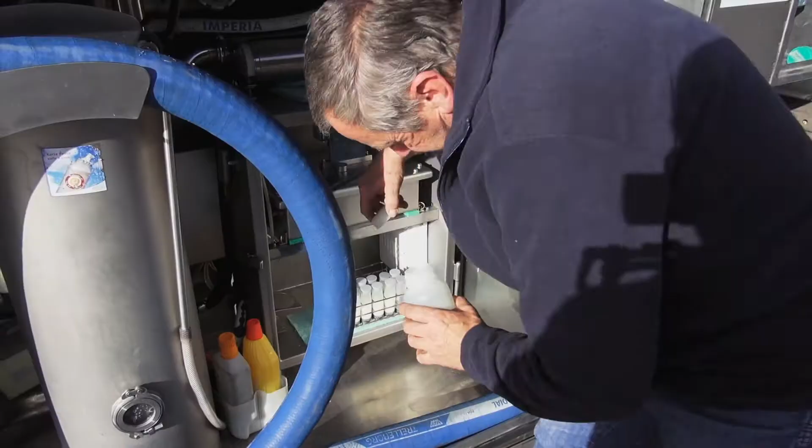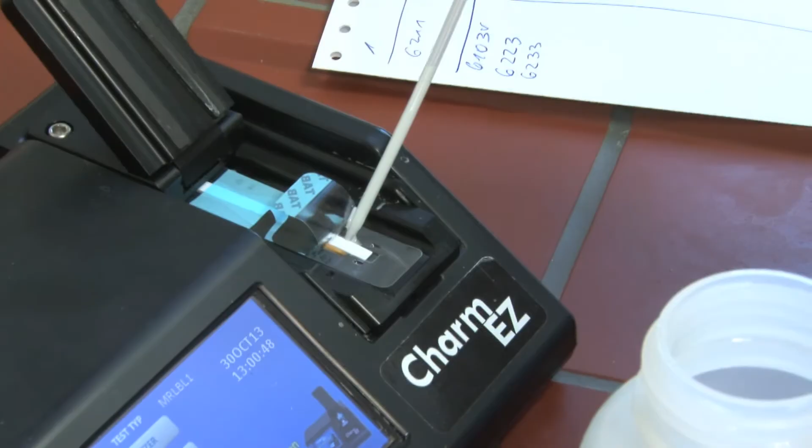Because the tank trucks transport milk from several farmers, each farmer must supply a sample. Every sample is tested in the cheese dairy's laboratory before the milk is discharged. The delivered milk is prepared by pasteurization and then filled into the cheese vats.

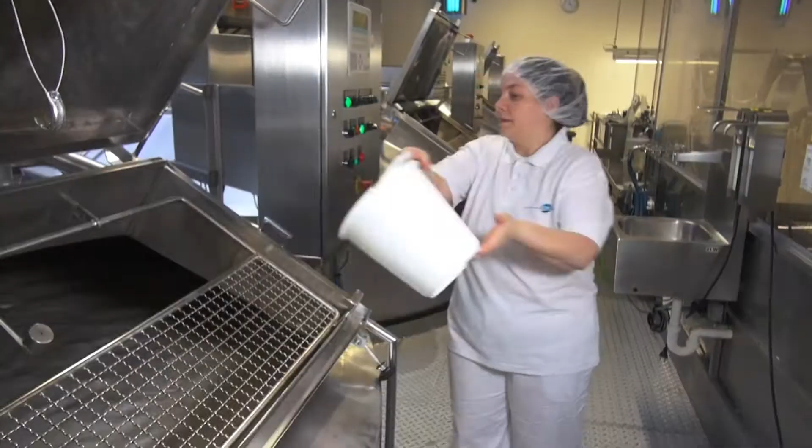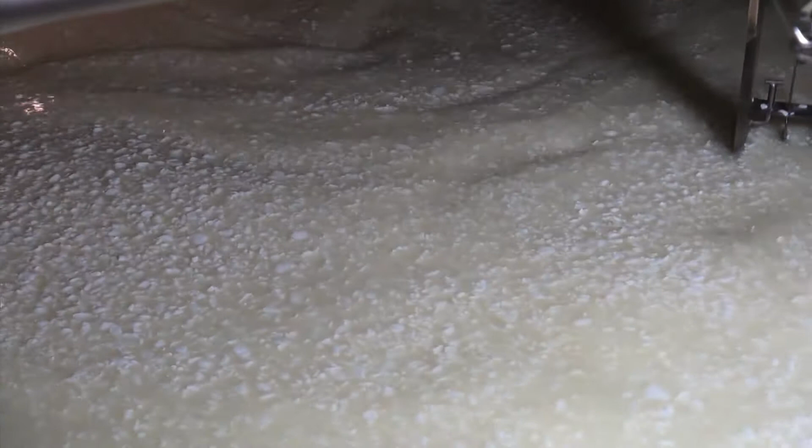By adding an enzyme mixture called rennet, the milk is curdled, as the experts say. The resulting curd is finely sliced with a so-called cheese harp. This separates the white curd, from which the cheese is later made, from the yellowish whey. Once the curd has settled, the sweet whey is pumped out.

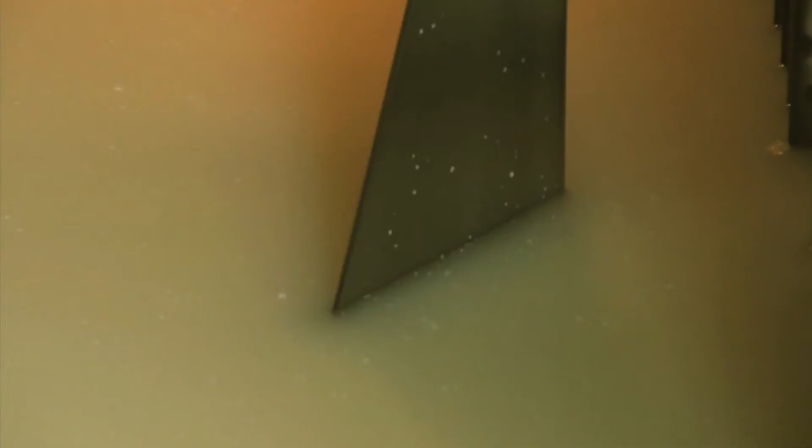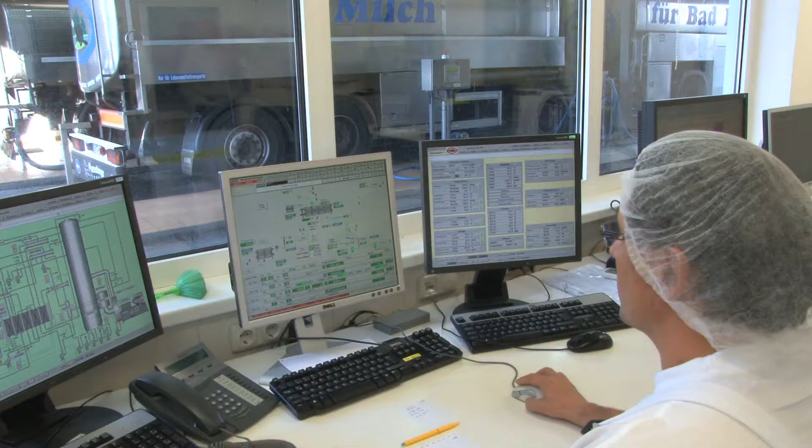As a byproduct of the cheese production, the sweet whey has a dry matter content of about 6%. On site in the dairy, the whey is gently concentrated to about 30% dry matter and stored. It is then loaded into tanker trucks for transport to Biolac. Whey is a valuable resource that contains nutritionally high-quality proteins, lactose and salts.

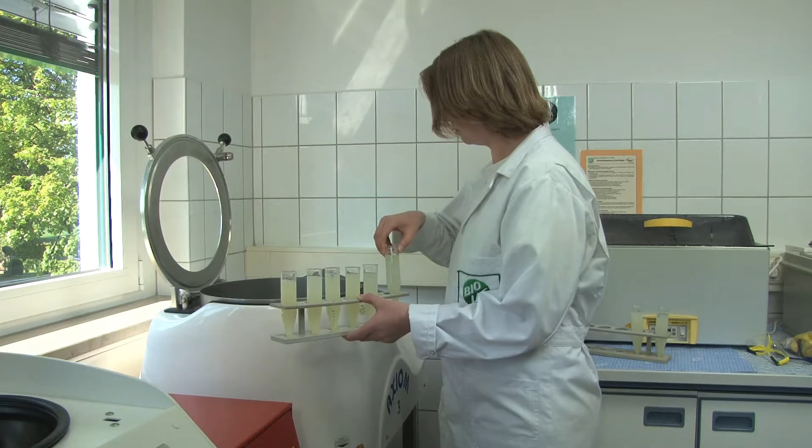Back to Biolac in Harbarnsen, Lower Saxony, near Hildesheim. This specialty company focuses on the processing and refinement of whey concentrate. The central location opens up the whole of northern Germany. The catchment area for the resource stretches from the island of Rügen over Schleswig-Holstein and Lower Saxony to Hessen and Saxony.

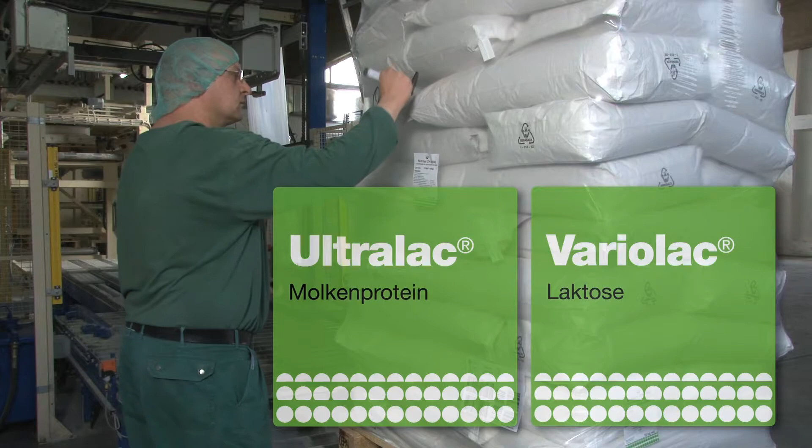The products, whey products under the Ultralac brand and lactose under the Variolac brand, are sold worldwide and used in many end products. In pastry products of all kinds, in confectionery and snacks, in yogurts, dressings, dips and other dairy products, in ice cream, in baby foods, dietary foods and energy products.

Lactose is used primarily as a flavoring material, as raw material in the pharmaceutical industry and as a filler or carrier. The whey protein combines high nutritional value with important functional properties, such as water binding, gelling ability and stabilizing.

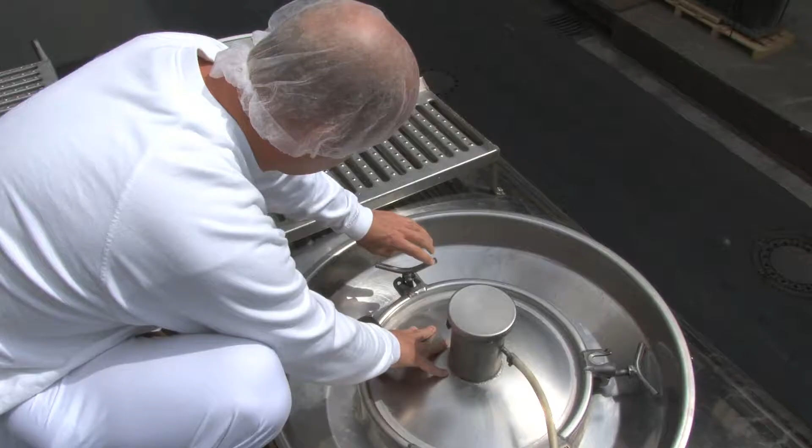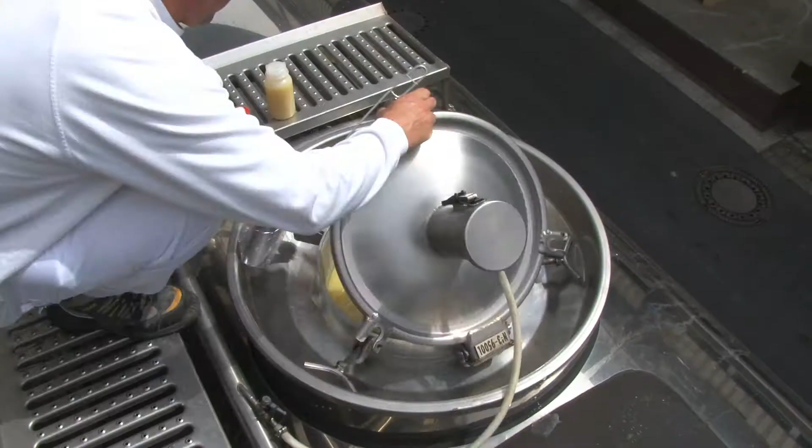The production at Biolac begins with the delivery of the raw material. The sweet whey concentrate is freshly delivered in tanker trucks around the clock, 7 days a week. Each delivery is inspected and sampled for pH value and temperature. Based on the sample results, the operator in charge of the raw material reception determines whether the shipment meets the high-quality requirements. Only then is the tanker truck unloaded.

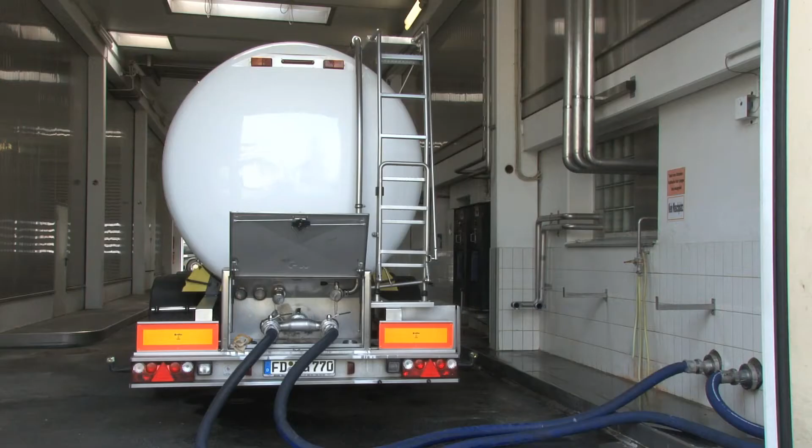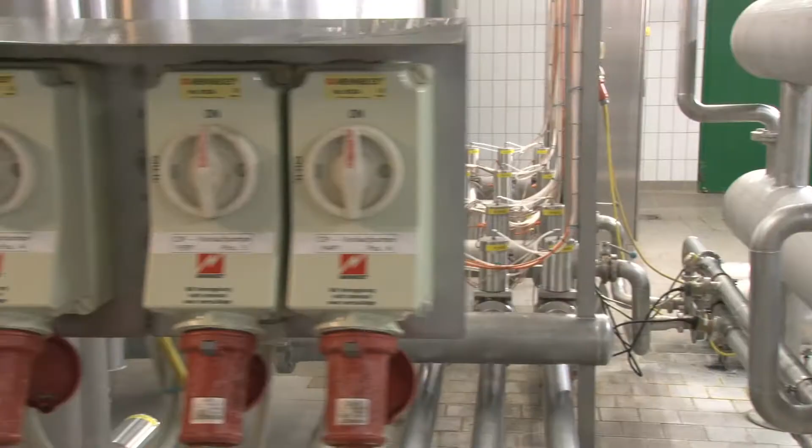The raw material is intermediately stored in special raw material tanks that can each hold 200,000 gallons. Subsequently, the actual processing starts. The raw material tanks, as are all tanks and equipment at Biolac, are completely cleaned after each discharge by CIP, which stands for cleaning in place, before being refilled again.

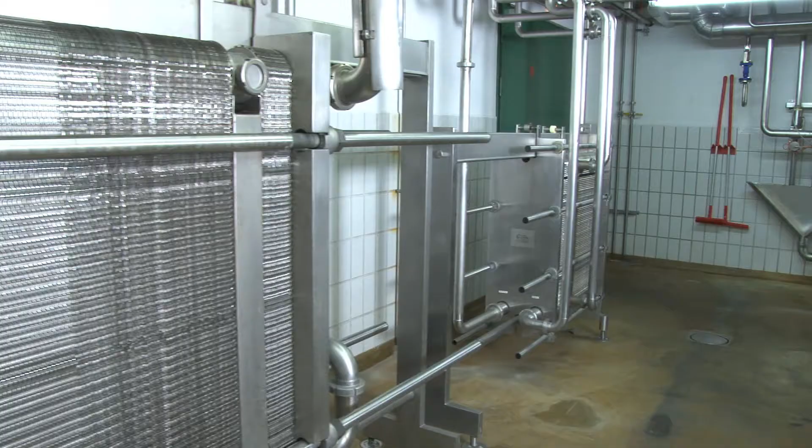During the thermal treatment of sweet whey, classic parameters of the dairy industry, such as pasteurization, are used, heating to 74 degrees Celsius for 15 seconds. The next stage is the ultrafiltration, also known as UF, the so-called heart of Biolac.

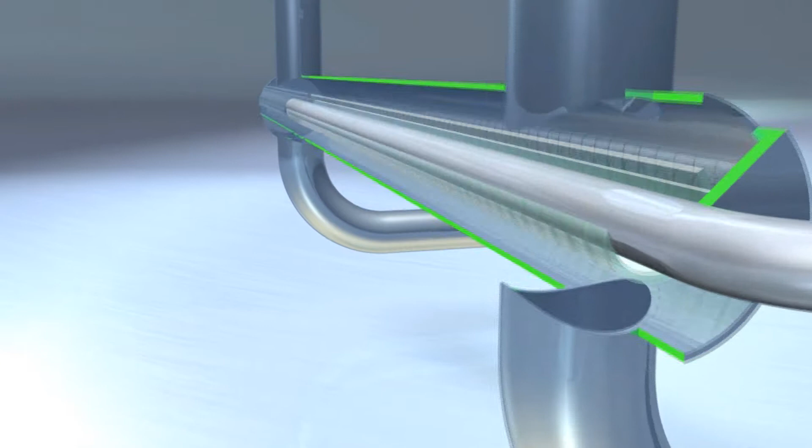In this highly modern ultrafiltration equipment, whey proteins and lactose are separated. This is possible because protein molecules are considerably larger than sugar molecules. The lactose penetrates as permeate through the filtration module, while the whey proteins are retained as retentate.

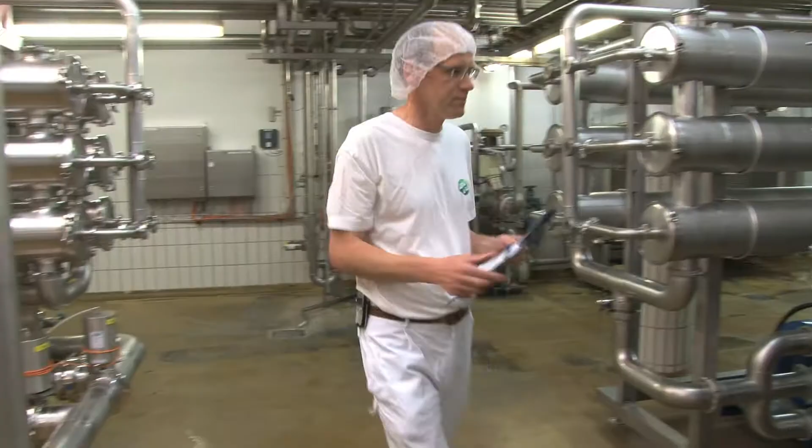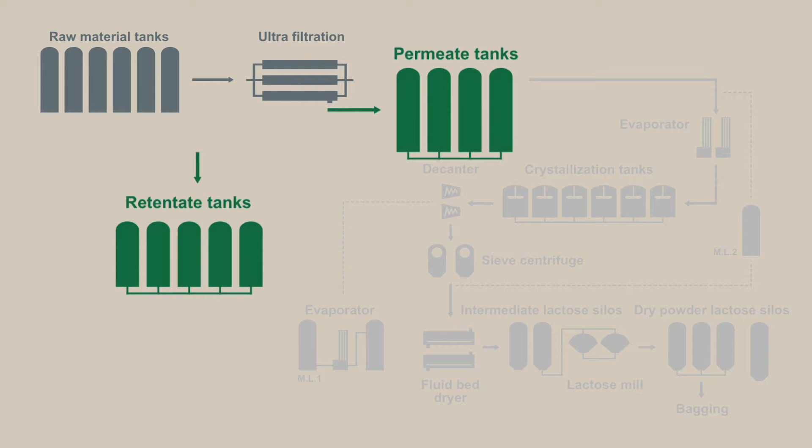The multi-stage UF system can be so accurately controlled that each customer receives exactly their requested whey protein concentration. After ultrafiltration, the whey protein and lactose constituents are individually further processed on separate production lines.

The permeate, the liquid lactose, is pale yellow in color. This color is caused by riboflavin, a vitamin that is naturally present in milk. On request, the permeate may be decolored, whereby the finished lactose is pure white. The permeate is initially concentrated in 2 steps.

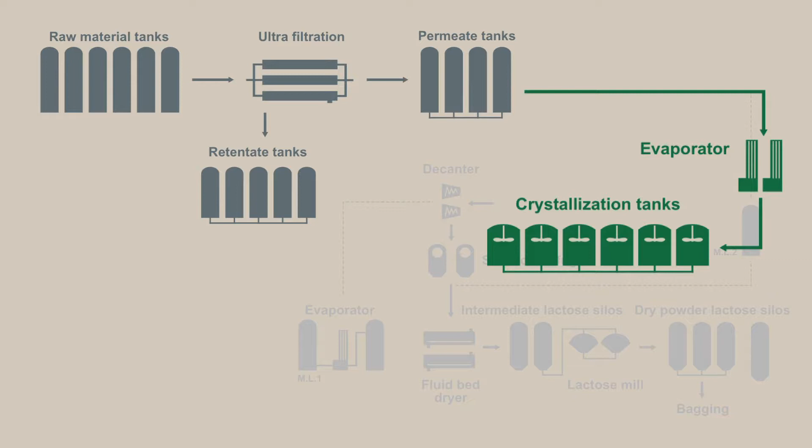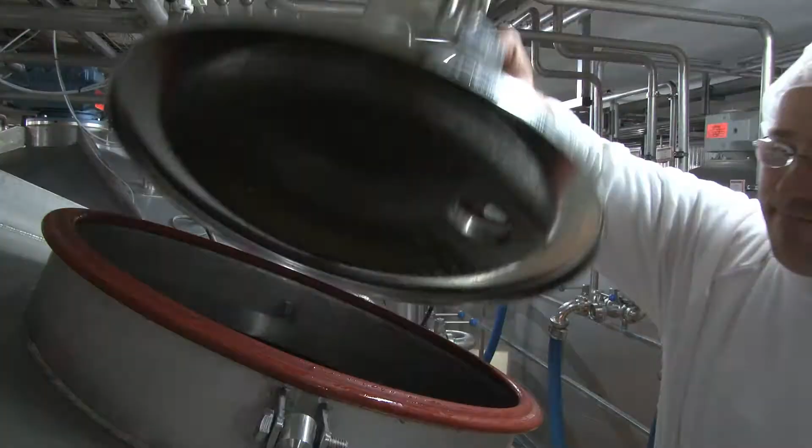Subsequently, it is charged into a crystallization tank. Here, the concentration of the lactose is already so high that crystallization begins spontaneously. Seed crystals or other crystallization aids are not necessary. At the end of the crystallization, the lactose crystals float in the remaining solution, the so-called mother liquor.

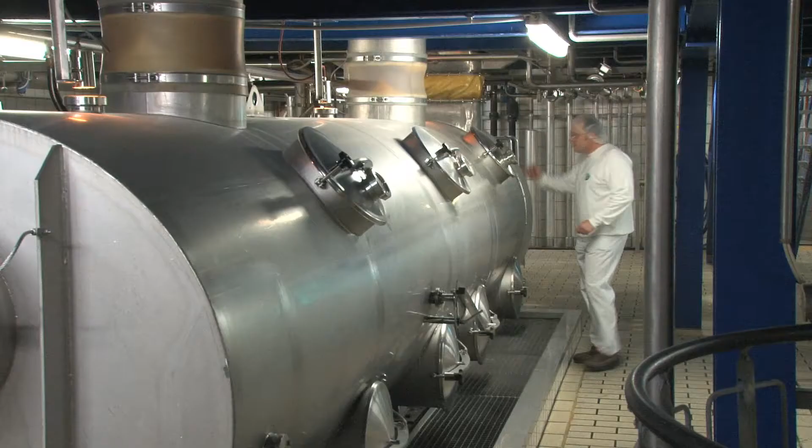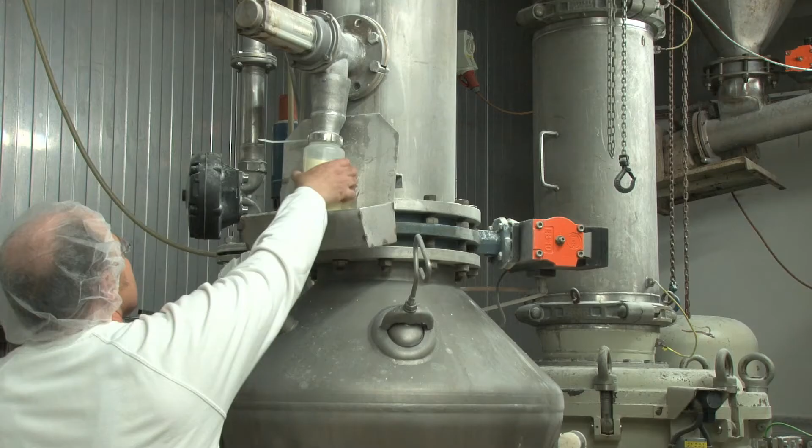The mother liquor is separated in 2 steps from the crystal pulp. The crystal pulp is then dried to a powder in a fluid bed dryer. Depending on customer requirements, the finished lactose can be ground in special mills. The spectrum ranges from fine table sugar to icing sugar.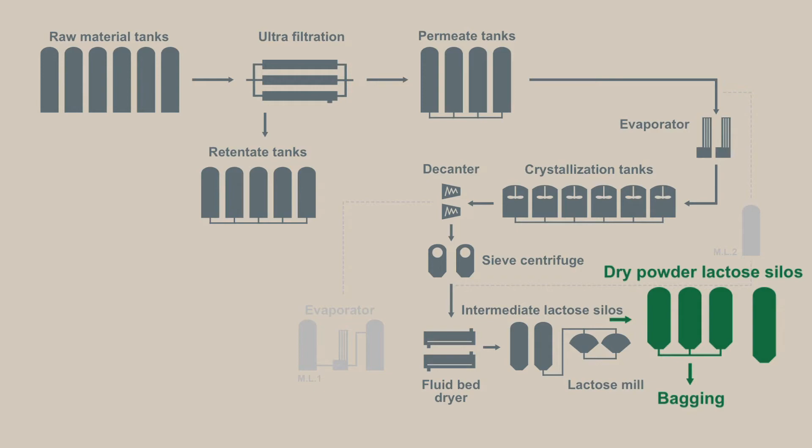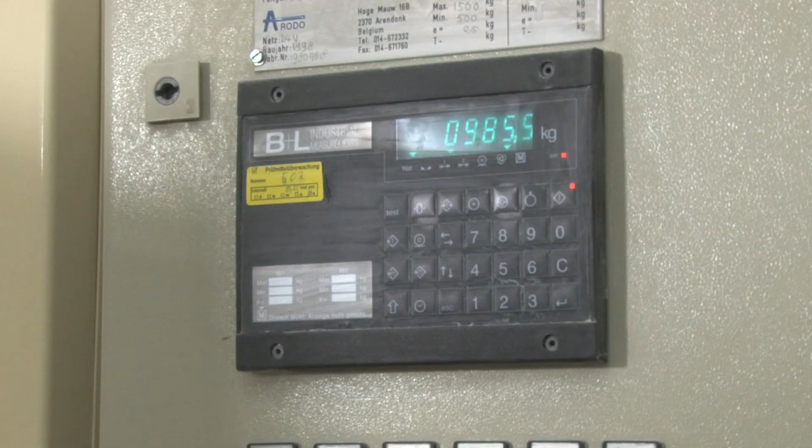The final powder product is intermediately stored in special silos. Based on the customer's wishes, the lactose can be filled into sacks of 25 kilograms. For large quantities, big bags between 500 and 1,000 kilograms are suitable, or loose filling directly into silo trucks.

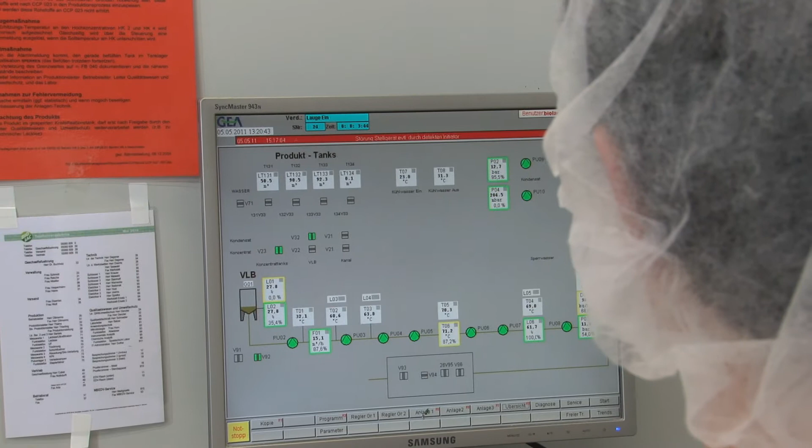The liquid retentate, the whey protein, is first heated. Thereby, important functional properties of the protein, such as the water binding powers, are set. A portion of the whey protein is supplied in liquid form by tanker trucks directly to customers in specific industries.

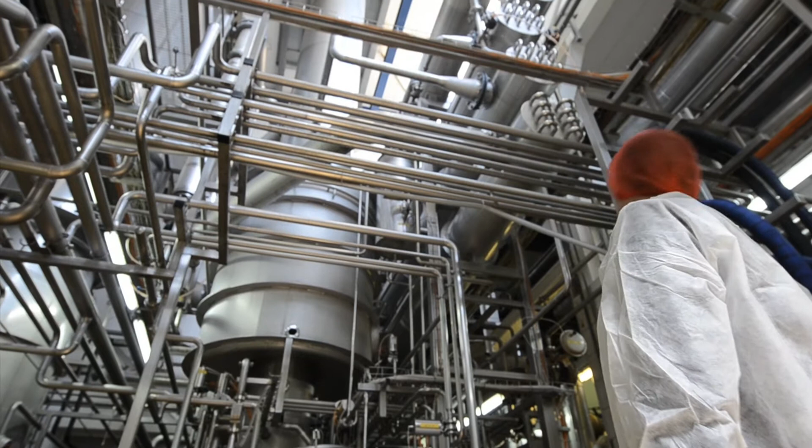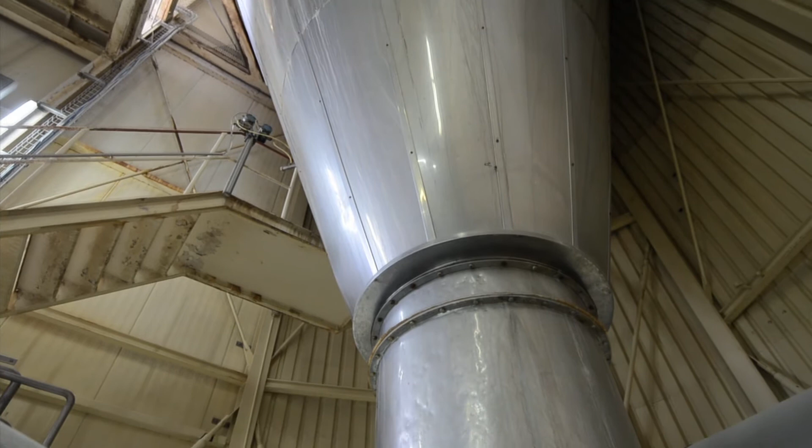For powder customers, the retentate is carefully concentrated in evaporators. The water is withdrawn from the liquid. This concentrate is finally dried to powder in 2 huge spray drying towers.

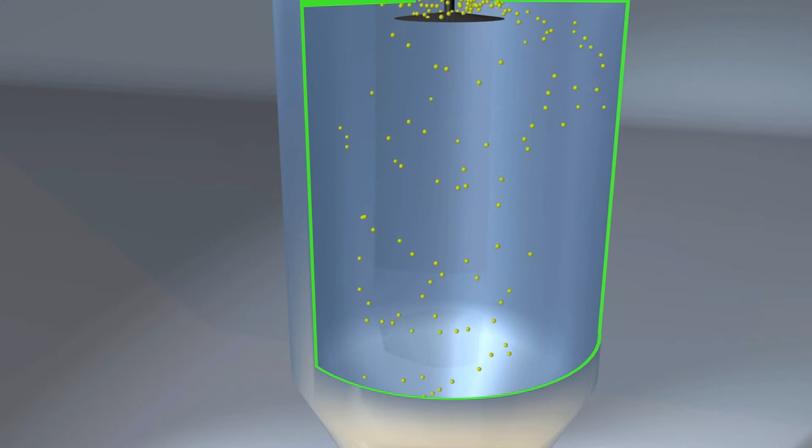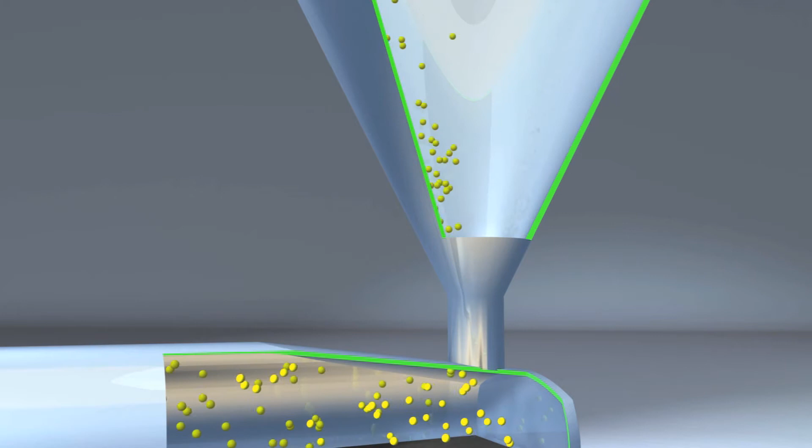In spray dryers, the liquid whey protein is pulverized into fine droplets over a rapidly rotating disc at the top. Simultaneously, specifically conditioned hot air is blown in from the bottom. On the way down, the water evaporates from the droplets. Only the powdered whey protein falls down to the bottom of the tower.

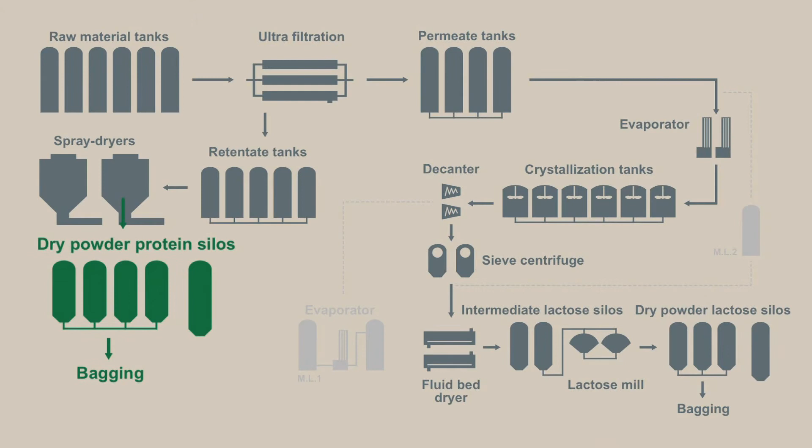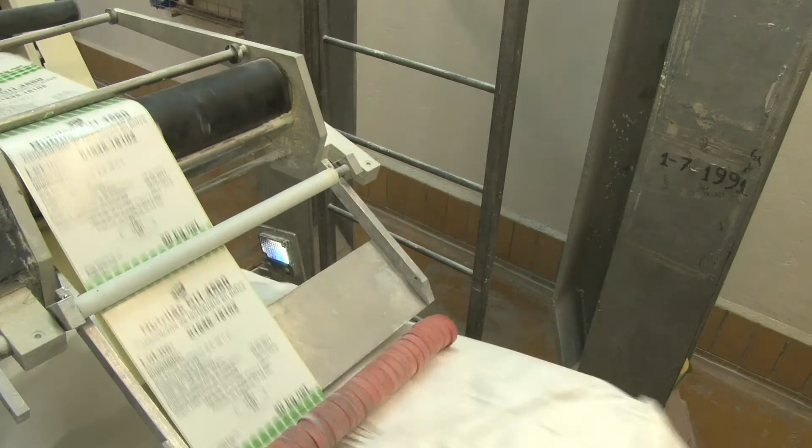The finished powder product is intermediately stored in silos and can be filled according to customer requirements: 25 kilogram sacks, big bags between 650 and 750 kilograms, or loose in silo trucks. In the high bay warehouse, about 1 month's production is constantly maintained. Even short-term customer orders can be processed immediately.

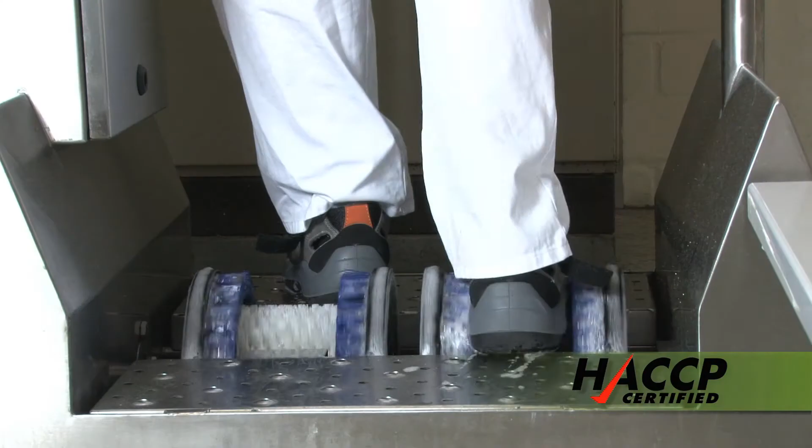Biolac customers rely on the constant and consistent high quality of products supplied. Biolac is certified according to various quality and food safety standards, among others, ISO 9001 and the current versions of IFS and BRC. In addition, food safety is ensured by a comprehensive HACCP concept. These include strict dress code and hygiene requirements, as well as strict adherence to hygiene zones.

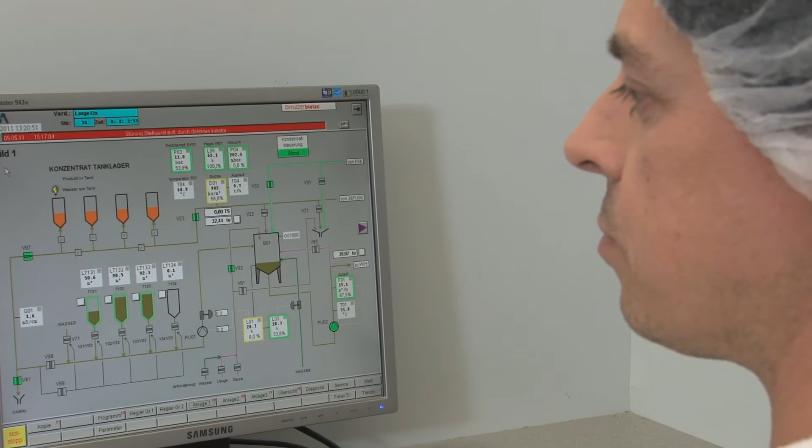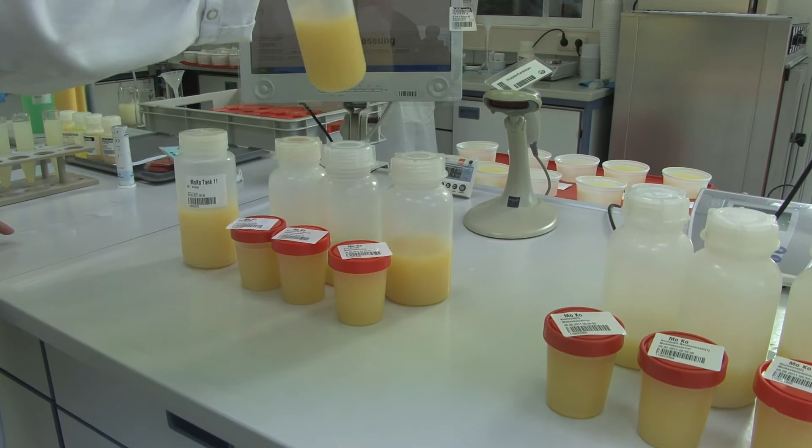The production is steered using the latest control technology. Highly qualified technical personnel continuously monitor each individual process. In the in-house laboratory, the chemical, physical and microbiological properties of the raw materials, as well as all intermediate and final products, are continually controlled and recorded.

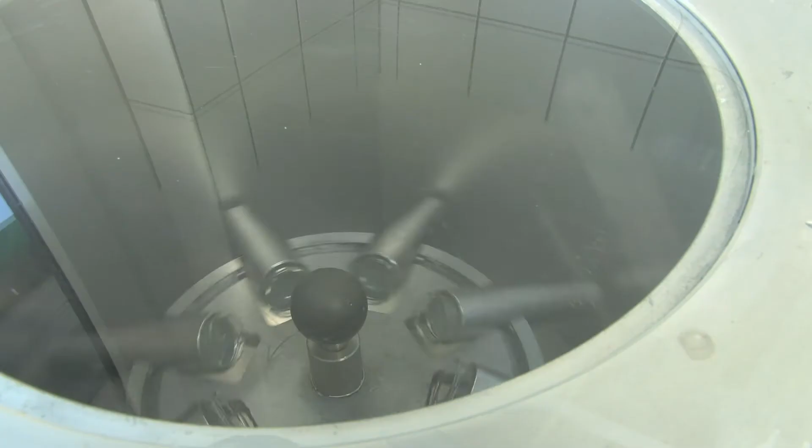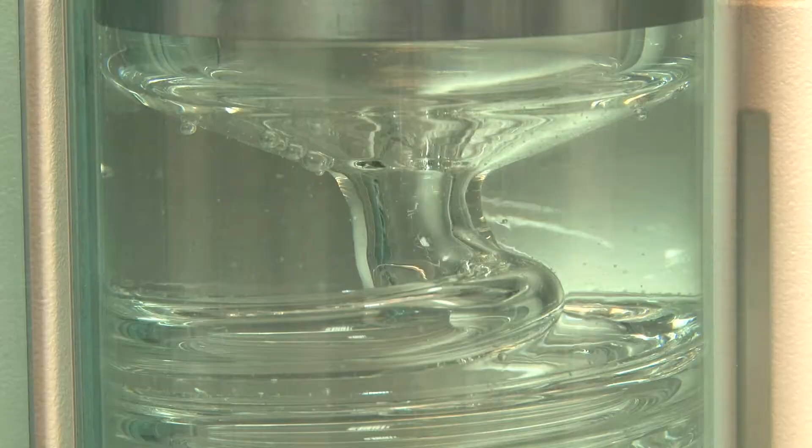In addition, Biolac supports its customers with technical application know-how. This occurs in close cooperation with the Danish dairy company Arla Foods Ingredients, which holds a 50% stake in Biolac. Even during the development of new products, Biolac is a sought-after partner and develops tailored solutions together with their customers.

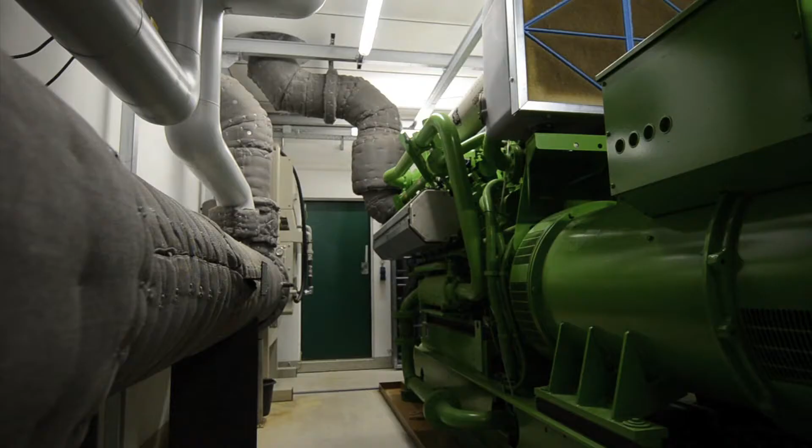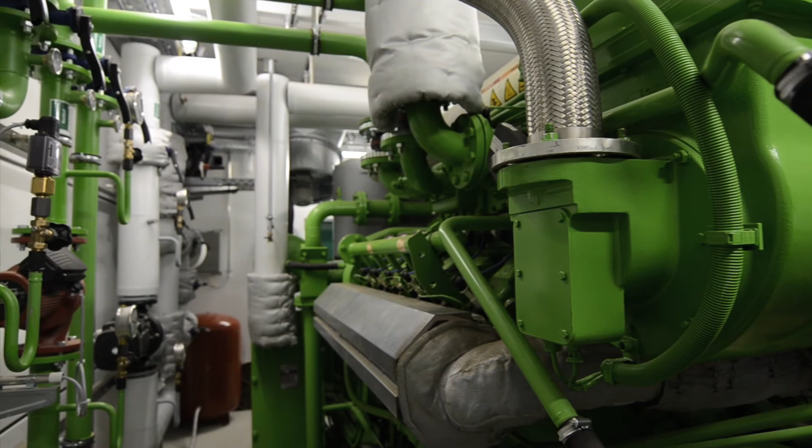Sustainability and environmental protection are taken very seriously at Biolac. A CHP plant at the premises optimally utilizes the energy consumed. Biolac is thereby based on the principle of combined heat and power. A gas engine drives a generator that produces electricity. The resulting waste heat is fed via a heat exchanger into the heating circuit and is not lost, so electricity and heat are produced simultaneously.

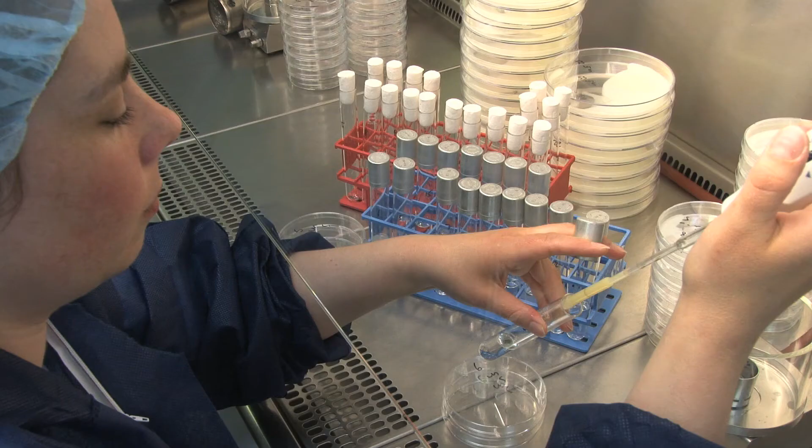The Biolac concept is proven and successful. With its high deliverability, consistent quality, flexibility, competence and expertise, Biolac has now reached a top position in the international market.